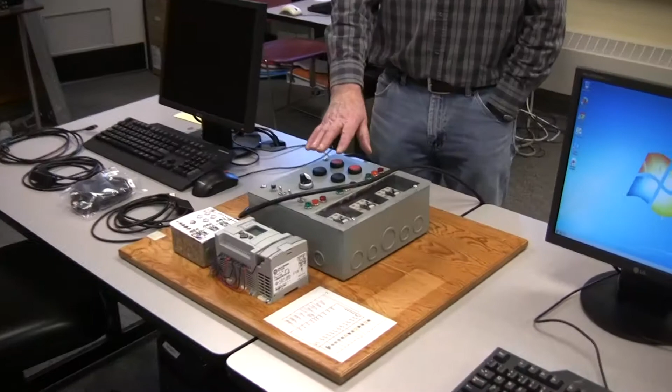The hardware is mounted on a piece of plywood. It contains everything that is needed to do the labs. At the bottom we see the PLC itself with an expansion module that's been attached to it. Beside it we have the 120 volt input power supply in a 4-inch square box with a printout of the I/O configuration. That's the input and output addresses.

The large gray box, of course, is the actual field hardware. Things like push buttons, stop and start, hand-off-auto, momentary push button, toggle switches, and the outputs will be represented by lights, 3 contactors, and there's a real wimpy little horn type affair inside of it.

So what I'm going to do to begin with is I'm just going to take a moment and I'm going to hook this up. And what I'm going to ask my lovely cameraman to do is to focus in on the PLC LCD screen, get right over top of it, and you'll see the self-diagnostic that takes place when it's first powered up. So I'm going to do that now.

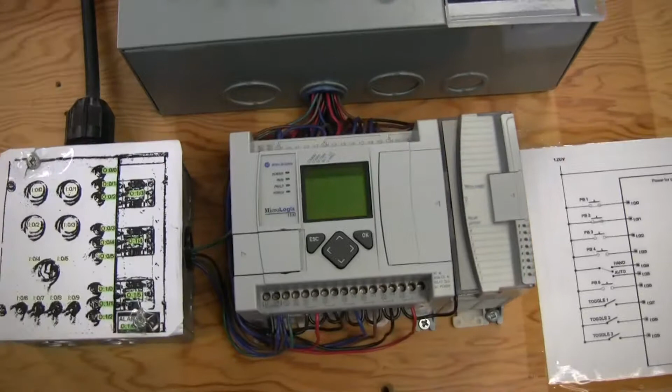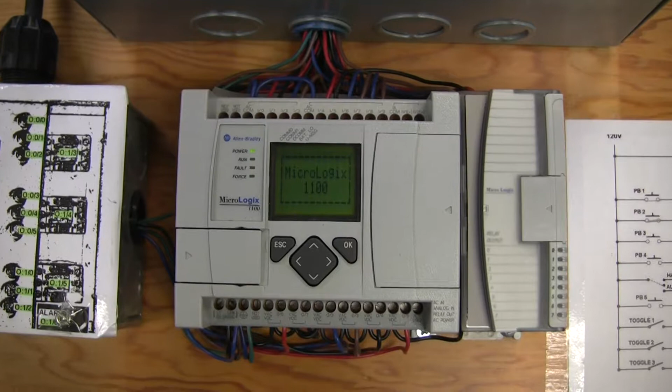All right, the self-diagnostic is complete, and we can see that the PLC is now up and running. It is in run mode, and the screen that is being shown is the status of the inputs and outputs. At the top you see a bunch of little boxes that are either shaded black or open white, and that tells me that their inputs are either on or off.

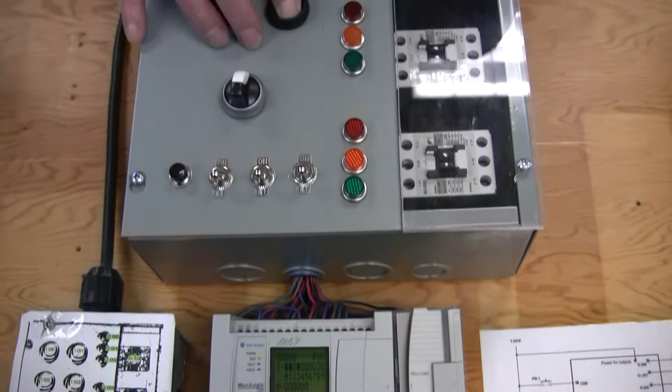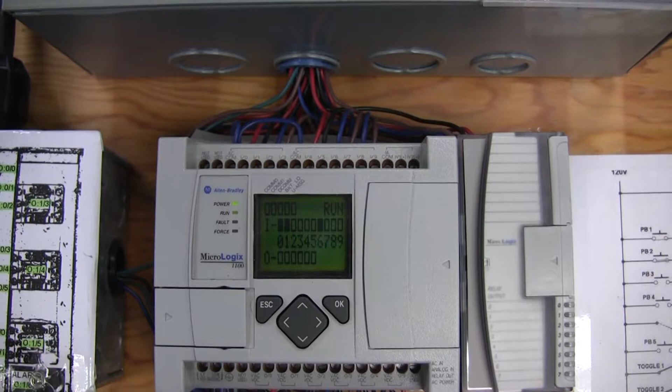I'll press a start button and see if you can tell the difference. Start button on, start button off. Start button on, start button off. I'll try the toggle switch. Toggle switch on, toggle switch off. Momentary contact, on, off. All right, so we're good to go. The PLC is up, it's running, it's in the run mode.

I'd like to have a look at some of the communication cables. Because what we're going to do is we're going to hook this device, the PLC, up to this computer here, and we're going to be doing some programming and changing how the PLC behaves. But in order to do that, we have to communicate between the PLC and the computer.

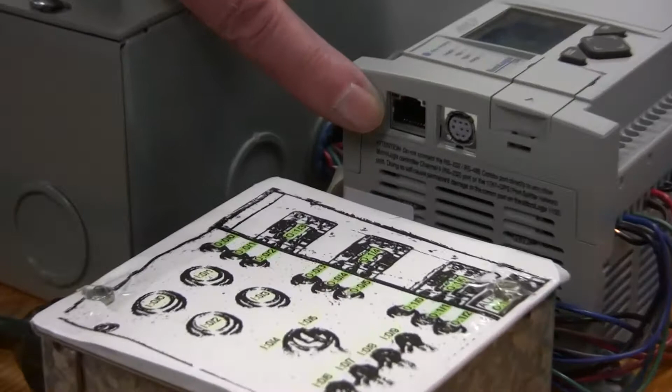Okay, if we could have a look on the side, and we'll introduce the 2 communication ports right over here, Dave. Okay, so I have 2 communication ports. I have an Ethernet port here, which we're not going to tackle. I mean, we certainly could, but we just get congestion on the network. This is a serial port, and this is the port that we will use.

Okay? Have a look at the desk in front of the next computer station, and you'll see 4 different cables. All of the cables have the serial end connection. This is the end that goes into the PLC. If you look closely, and I'm not sure how good the camera is, but there's an actual arrow embossed in the plastic, and that arrow goes to the top when you plug it in.

Okay, we were talking about the serial connection that goes to the PLC. These connections are what they call keyed, meaning they can only go in one way, and that's where the arrow comes in to help us. The arrow is pointing up when you insert it into the PLC.

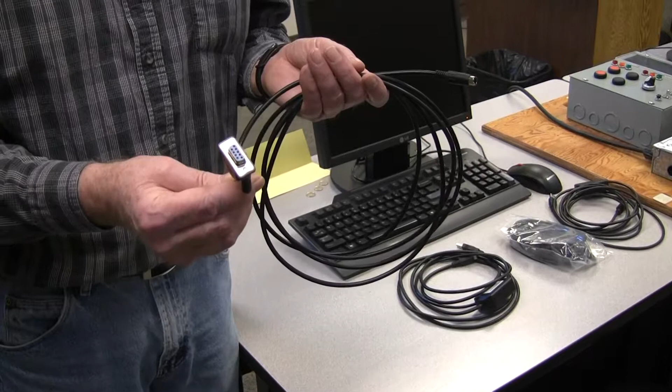All right, now this cable has a different end on it. This end goes into a computer, but this is a rather old style serial port, and many computers no longer have these. Luckily, ours do, but perhaps the next time they refresh this lab, the computers won't have this, and we're going to have to find another option. That's where these converter cables come in.

Again, we see the serial end that goes into the PLC, but this time the other end is much more familiar. This is a USB end, and it fits into any common USB port. We've used these for about 4 years perhaps, and we have 3 different versions of this serial to USB conversion.

This black unidentified box is version 1. It's very glitchy and tends to lose communication regularly, so we're not going to be using this. If you see one of the PLCs that is using this particular cable, just take it away, replace it with a newer one, and you'll have less problems.

This is the second version. Again, serial to USB, but this time it's labeled. And you can see that it actually has a date on it. The date in this particular case is 2015.

This cable is better than the first one, but we found that we still get drops on this. Occasionally, when we're communicating with the PLC, it'll just lose communications. We're not really sure what's causing it. We think it could be a driver issue, but it's just something that we've had to deal with.

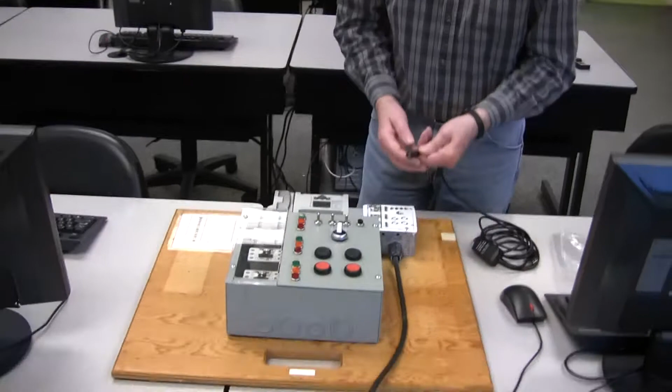I'm making sure that the, boy, I say a lot, eh? I can edit that out.

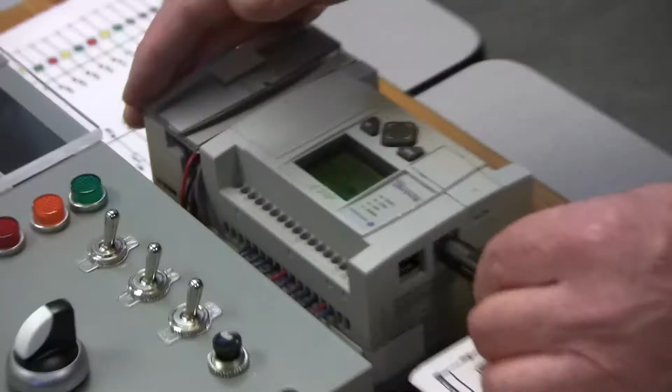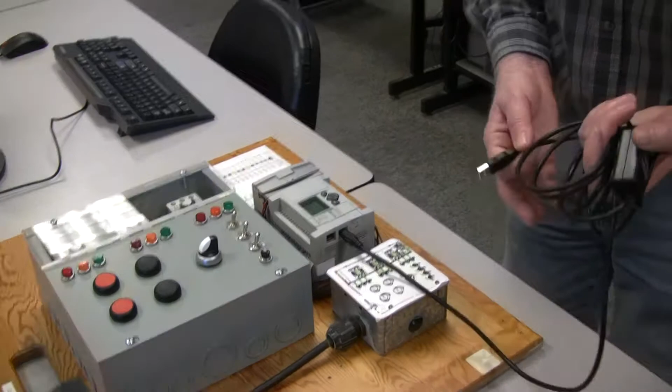This one is very hard to see the arrow, but I can see it. I'm going to ensure that it is facing upwards when I insert it into the serial port. Be very gentle. Those pins will easily bend and pretty well render the cable useless. One end is done. I'm going to put the other end into a USB port on my computer.

There are 2 programs that we use when we're programming PLCs. One program is strictly used for communicating to make sure that we're talking to the PLC. However, before we do any work on either of those 2 programs, I have to go into Windows and do a little investigating. So I'm going to go into Start and Control Panel, and then I'm going to find Device Manager. That's what I'm after.

It gives me a warning that I'm not an administrator and I can't make changes. Well, that's okay. I don't want to make any changes. I just want to see something. This is Device Manager. I'll make it big. So the information I'm looking for is in ports labeled COM and LPT. If I click in front of that, I'm going to see right here USB serial CH340.

I'm going to make that bigger if I can. I'm not sure if I can zoom that up for you. I'm afraid I can't. I think I got it. You think you got it?

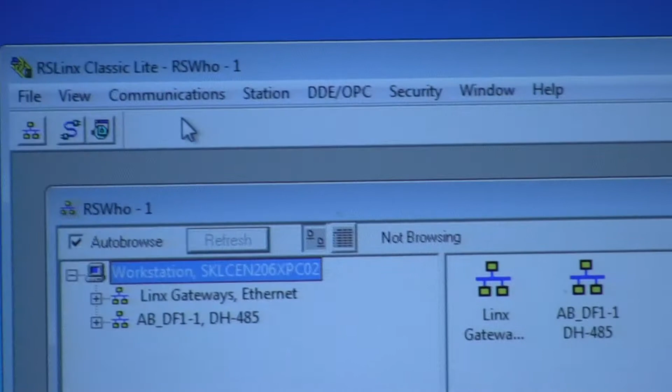All right, I'm taking a look at a typical screen. It may or may not come as it's shown here. If this program starts with nothing but a gray screen that looks like this, all you have to do is go to Communications and click on the very first option, RSWho. That will give us that same information window.

I'm going to make it big. Wonder if I can make this larger. No. What I'm going to do is I'm going to click on the DF1, Delta Foxtrot 1. That's our driver. That's where my PLC should be. I should be seeing something there. And indeed, I'm seeing that the MicroLogix 1100 is connected there. But there's a red X in front of it. So I have to get rid of the red X. The red X tells me, of course, that it's not communicating yet.

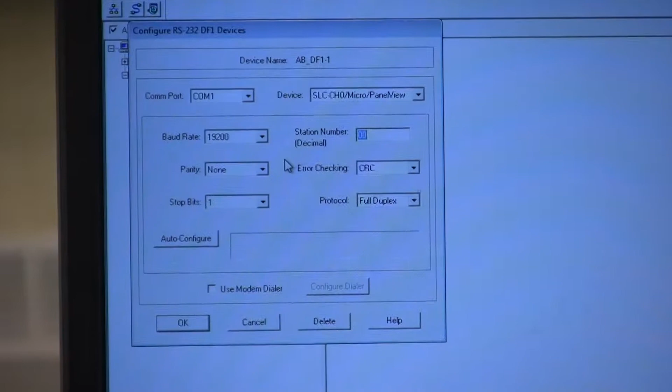Simply click on it to highlight, then right-click, and select Configure Driver. Here is where we change the COM port. The reason it's not communicating is because this is set to COM port 1. I need to change that to COM port 6. Click the drop-down box, scroll down, there's COM 6. Make sure that you've selected the proper COM port, and there's just one thing left to do, and that's click the Auto Configure button right here, the Auto Configure button.

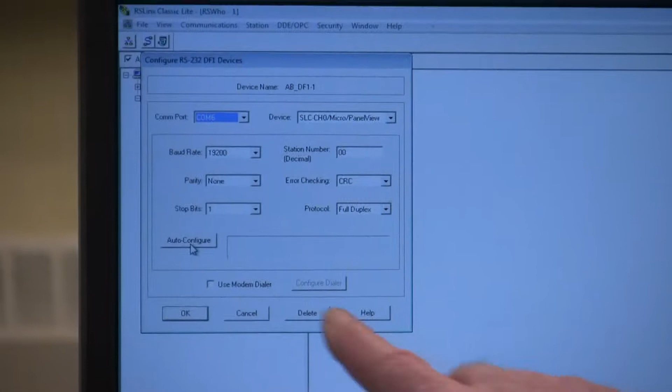And it's not necessarily always going to be COM port 6, am I right? Oh no, that's the problem. The whole problem with this communication is the COM port changes. So if I unplug it from this computer and plug it into another computer, that other computer will put it on COM 8, or another one will put it on COM 5. So I have to always know the COM port before I come in here to change it in RSLinx.

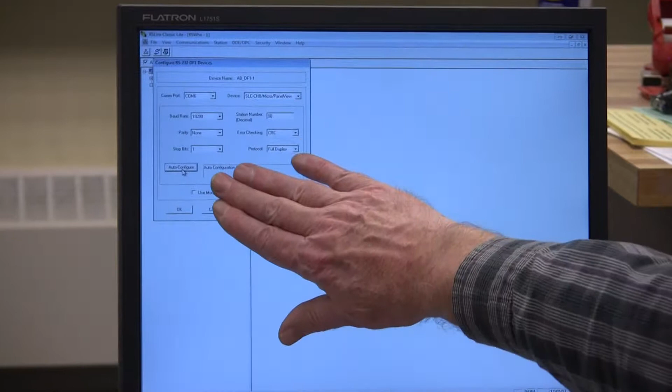In this case, I get a readout that says auto configuration successful. There is one peculiarity with this program, and that is occasionally I'll hit auto configuration and it'll come up with an error screen. Get rid of the error screen, and behind it you'll see that it'll say auto configuration successful. It seems to be a glitch in the programming of the software itself. But all I'm after now is this printout, auto configuration successful.

I'll click OK, and just wait a moment, and the X disappears. The X is now off of the Micrologix. The PLC and the computer are now connected and talking to each other. I'm going to minimize this. I could close it, there's no problem with closing it, but I'm just going to minimize it in case I need to get back in.

And we'll now have a look at the second piece of Rockwell software, and that's the programming software. It's called RSLogix Micro. So we go into all programs, and again we go to Rockwell software, RSLogix Micro, English. We don't have the French version. And I'll click on that. And we're presented with this screen. It is a blank slate.

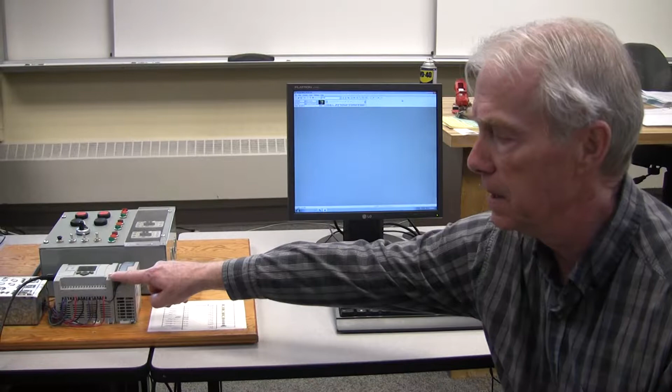We have no program yet to manipulate. There's two things we can do. We can start a new program and start building a new program, or we can have a look at what's already in here. A student has been programming on this, and there is a program in here. It's kind of cool to have a look and see what the last class has done. So what I'm going to do is take a look at the program that is running in this PLC right now. And in order to do that, I go up into comms. There's a tab right at the very top called comms.

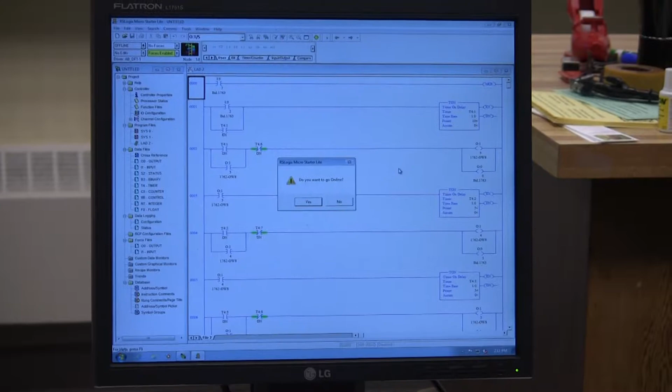And the option I have is upload. All right, that's the only option I have. I'm either going to download into a PLC or I'm going to upload from a PLC. Those are the two ways I can communicate. Right now I don't have anything built, so the only option I have is to actually upload from the PLC. I'm going to give that a try. You just click the box that says create a new file, and the uploading takes place. And there's a box that asks if you want to go online, and you can click yes or no.

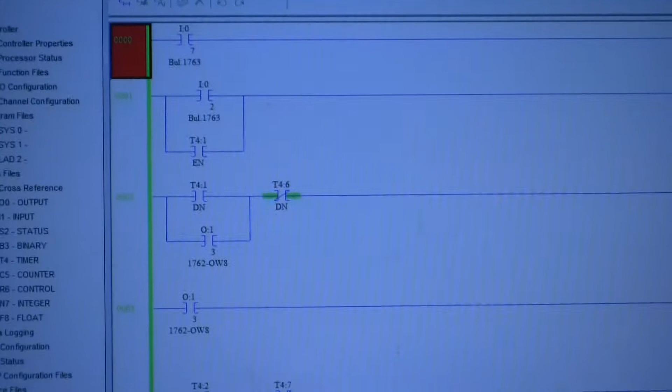And you can scroll through this program and take a look at some of the work that the previous student has done. There appears to be a lot of timers here. Actually, there's quite a few timers here. You could possibly run this program if you wish, but that's getting a little bit ahead of ourselves. Anyway, it's just kind of cool to look at what some of the other people have done.

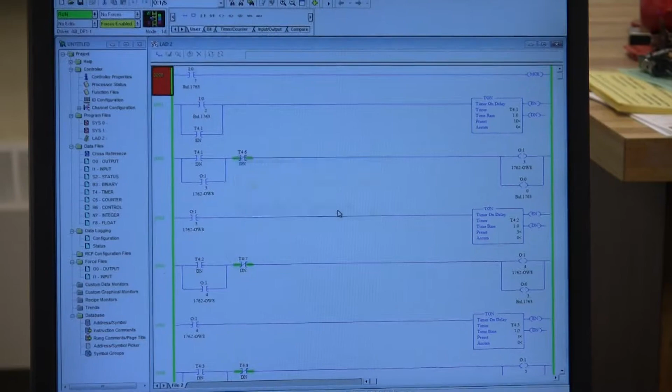What I'm going to do now is start a new file and a new program, a new project for us to build. And all you do in typical Windows fashion is go File, New, and it's going to ask me if we want to close this existing file, and of course we're going to say yes to that. We're not going to save any changes to it.

And we're presented with this box, and this is a very important box. This tells the program what PLC we have. This software can work with a bunch of different PLCs, but we have to know which one we're programming for. We're programming for the very first option, which is an 1100 Series B. So there's no need to change anything here. Just click OK. That looks a lot better. Now we've got a blank white space here where we can build our program.

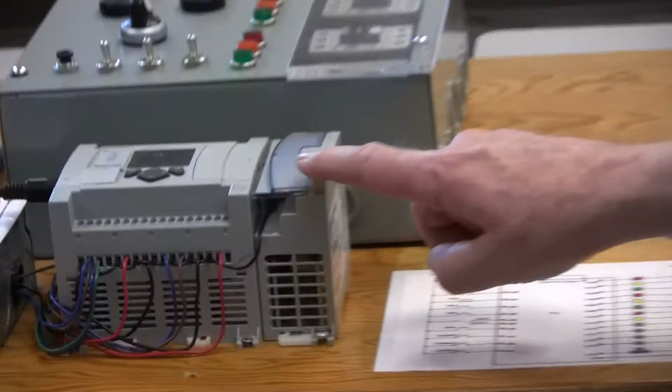But we're not quite done yet. We're not quite done telling the computer about our PLC. We have to tell our computer that not only do we have a PLC, we actually have an expansion module as well. So I have to tell the computer about this expansion module. And I'm going to do that by going to, on the left-hand column, something called IO config. This makes sense because the expansion module is an additional output. So I'm going to double-click that.

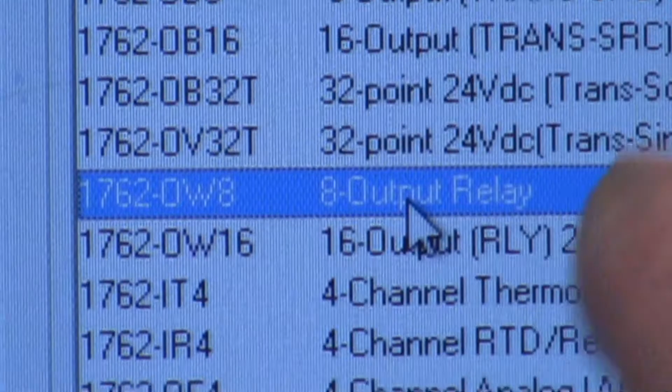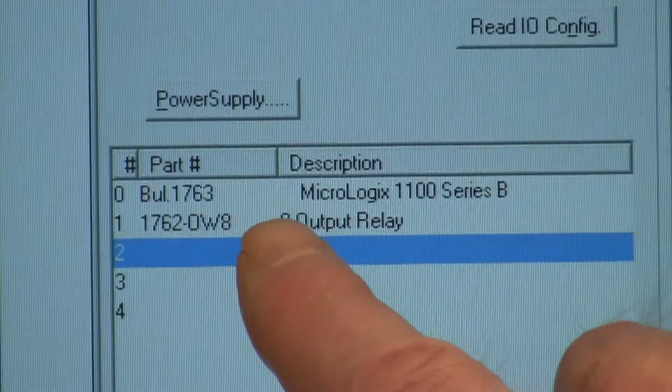If you read on the side of the expansion module, you'll see that this is a 1762-OW8. You can make that selection on the right-hand side here, and I'll highlight it. And there it is. And all I have to do is double-click, and it'll move that over onto my PLC. This is my PLC here. These are the available expansion modules. I'm going to double-click. And now you'll see that I have my MicroLogix 1100 Series B and an 8-output relay expansion module OW8. This is good. We're done with that. I can just X out of it.

All right, this is quite a procedure, but believe it or not, it will get to become second nature. You'll be doing it fairly regularly. We'll do a really, really simple program on the screen here, and we will then download it into the PLC. We'll take a look at how it works, and from that point on, you can work on your own projects.

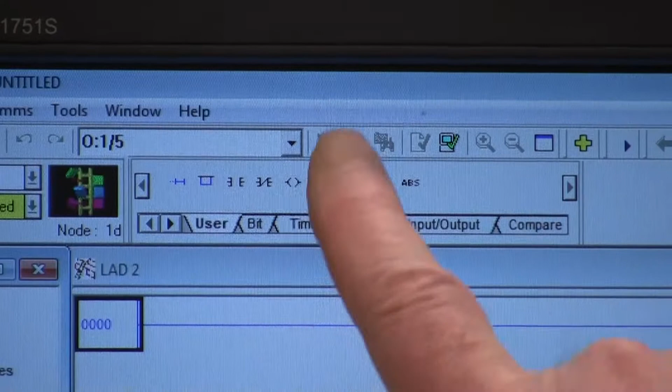Okay, we are going to make our first simple program. We're going to take a look at the software, and at the top of the software we're going to see some familiar symbols. We have our examine on, our examine off, and our output energized. That's right at the very beginning of this software under the User tab.

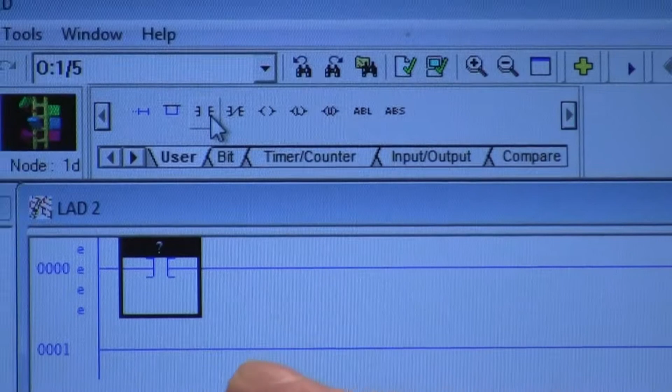All I have to do is highlight the rung. So I'm going to highlight the rung in red, and then I'm going to start clicking on the devices I want. I'm going to click and it'll insert automatically my first examine on. Now this is where it gets really, really easy to manipulate. The next contact you're going to bring in, click and drag it. Don't just click, but click and drag it.

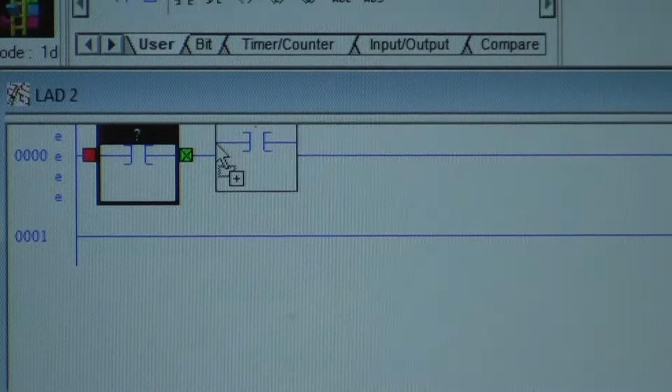And you'll see some red boxes show up. You can drag it around to wherever the red box turns green. So I've now turned the red box green. I'm going to let it go. And I now have two of those instructions, both examine on. And I'm going to actually just do a little stop-start station here.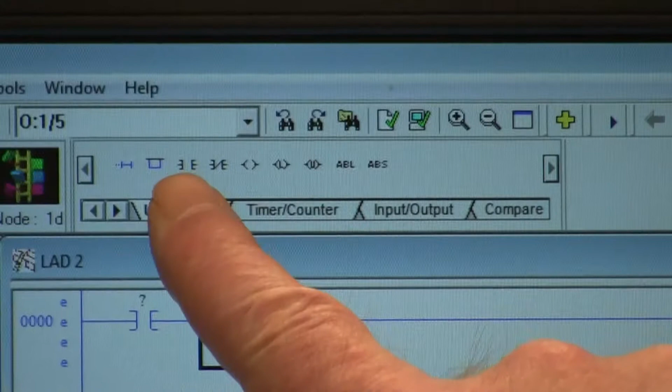So I need a branching circuit, and right to the left of the examine on is the branching circuit. So I'm going to click and drag that. And again, bring it to a place until it turns green, and you'll see that it's not doing me any good here. But I do have a rung that's highlighted, so I'm going to click and drag that and bring it over until it turns green, and now I have my branched instruction around this examine on.

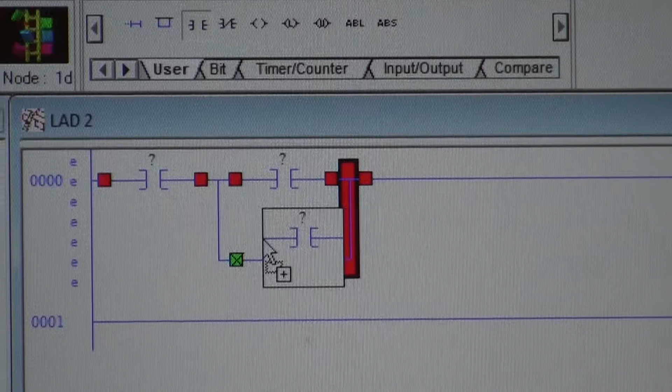What do I do now? I go back up, click another examine on, drag it down, and I can put it anywhere. I've got a lot of options. I'm going to put it down in the bottom rung. It's turned green. And I now have my stop, start, holding contact configured in software. I still have to put in an output energized, but that's relatively simple.

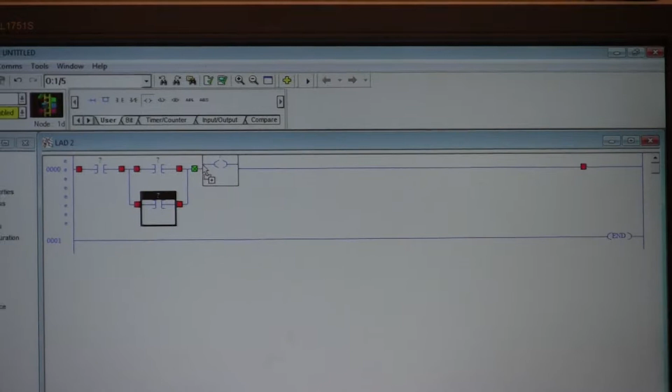I'll click, hold, drag, and if I put it here where it's turned green, it's probably going to snap to the end anyway, because a coil or an output energized must be the last item on the line. And it did. It went all the way to the end.

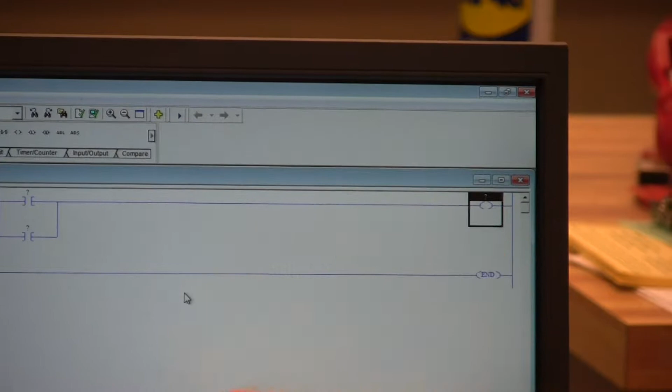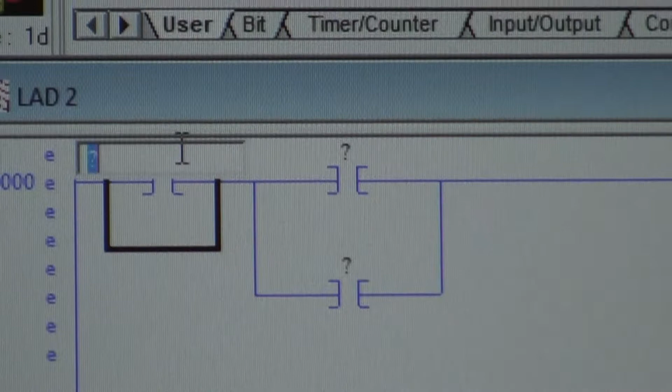So what's left to do with this is I have to give some addresses to this. If I tried to run this program, it wouldn't even allow me to download it because it doesn't know what the addresses are. So I'm going to start inputting addresses. There's a little question mark above each of these instructions. I'm going to double click on the question mark. And this is an input, so I'm going to look over here on my input diagram here, and my stop button is input 0/0. So that's the address I'm going to put here.

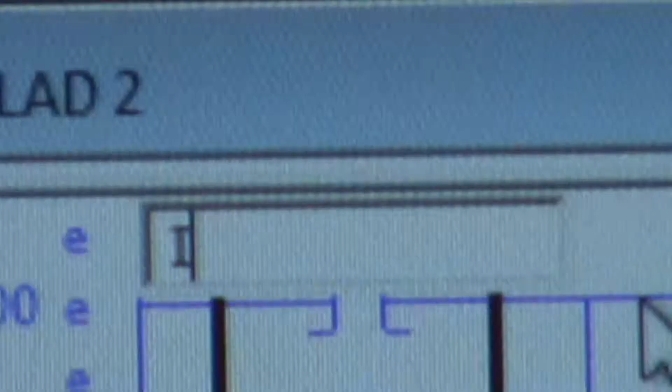Now please pay attention, because it's critical that you put it in this way, or else you'll get an error. So what I'm going to do is I'm going to go I, Shift, colon. So this is not a semicolon. A semicolon will give you an error. I have to have the two dots, not the dot and comma. So that's a colon. This is what I've got. I've got I, colon, 0/0. That is an address for the stop button. I:0/0.

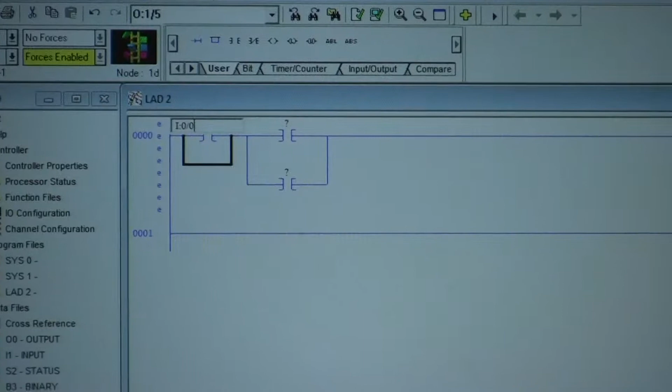And you can see them. They're listed and detailed on the I/O sheet on the PLC backboard. So you can get any address you want off of this roadmap. So I'm going to take a look for a start button. And the first start button is input 0/1. So I'm going to now put that over my start button.

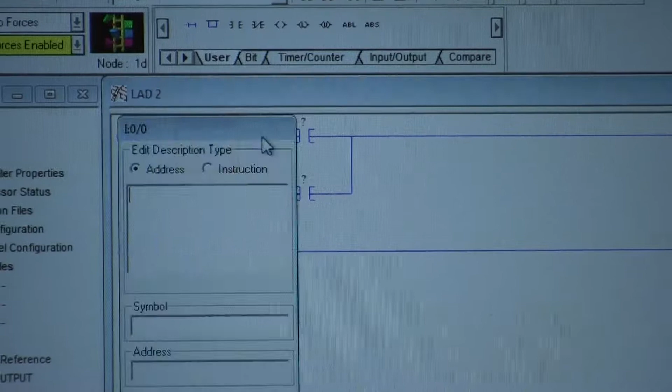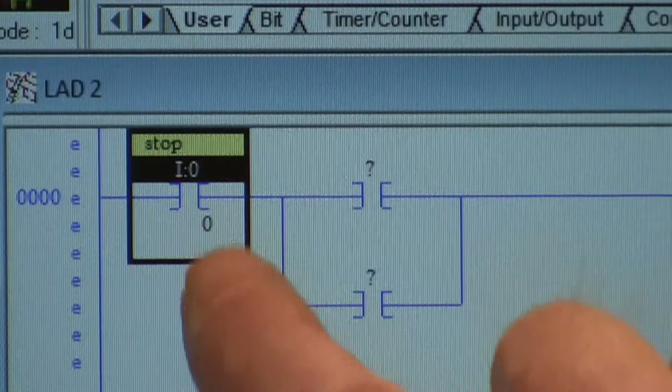There's an annoying little feature here. When I hit enter after I've inputted an address, I get this description box. What I can actually do here is I can actually put a label on this. So that's what I'll do. I'm going to put stop and click OK. And now if you take a look at the screen, not only will you see the address, but you'll see that this is a stop button.

Okay, I'll do the next one a bit more quickly. I'm going to put input 0/2. That's the first start button that's available. 2. And I'm going to hit enter, and I'll put START. That'll indicate that this is my start button. Good. And we're good to go. And now I'm going to go all the way to the end rung, all the way down here, and I'm going to put in my first output instruction.

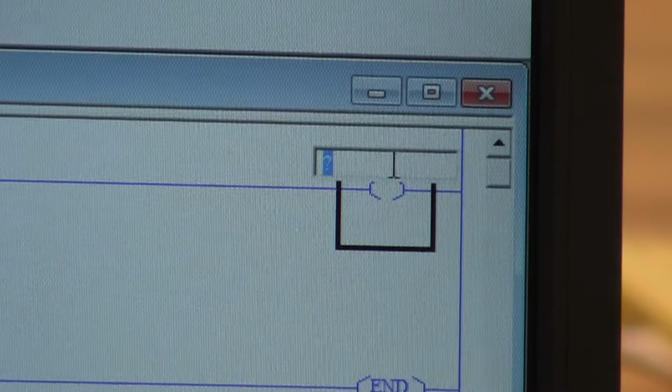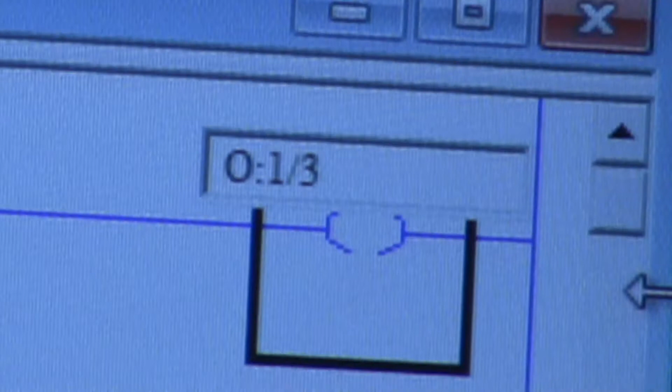Now I want to be dramatic because, well, people like to be dramatic. You know, lights are nice, but I like to hear noise. I'm going to make a contactor energize here. So I'm going to take a look at my first contactor address, and it is output 1/3. So that's what I'm going to enter in here. Output: 1/3. Hit enter, and I can call this what I want. Perhaps this will be motor 1.

So now I have a stop, a start, and motor 1. Now in motor control, you're used to using a holding contact to seal in the operation of a stop-start station. But in PLCs, we don't need a dedicated holding contact. We can actually use the output energize instruction itself as the holding contact. Let me show you what I mean.

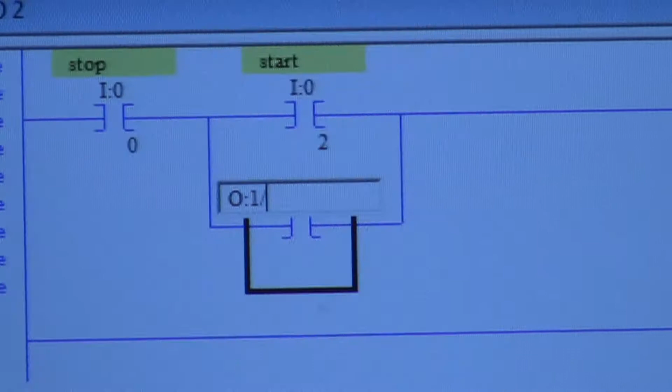I'm going to address this output :1/3. I'll hit enter, and you'll see that motor 1 output is going to form the holding contact for my stop start. I think I've got it. I think this is a good, valid program. But before I do anything, I have to verify that there's no errors because, well, everybody does make errors. And up at the top, you're going to see...

You've never made an error. Come on. Well, no. Other people make errors. Okay, thanks. Other people do.

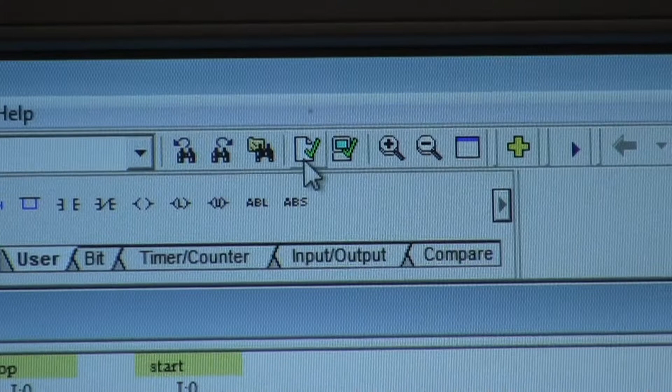So I'm pointing out here that, right in the middle, there's a little green check mark. The little green check mark is what I'm going to press, and it'll scan my program and inform me if I have any errors. And down here at the bottom, it says verify has completed, no errors found.

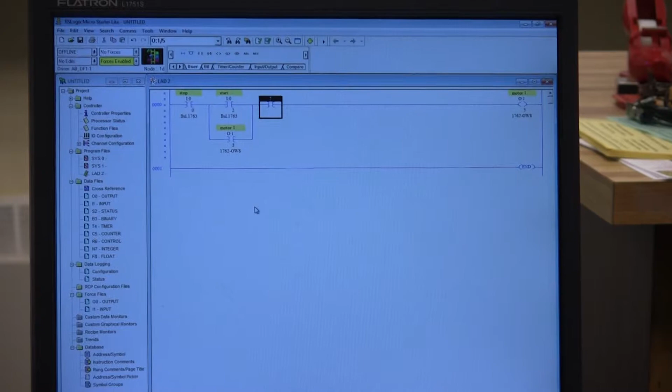I want to show you an error, so I'll deliberately place an error in this program. I'm going to grab an instruction, I'll place it, and I won't address it. That should be an error, so I'll go back up and I'll try to verify. Now you'll see at the bottom a box has opened, and it tells me rung 0, instruction 7, error. It says the operation has not been entered. We have to enter something for this instruction.

So the software will tell you if you have your program done right or if you've got errors in your programming. Right now I'll just delete that because of course I don't need it to run. All right, we're ready to go. I now want to get this program into the PLC. If you remember, when we wanted to go from PLC to computer, we uploaded. Well, what we want to do now is download into the PLC.

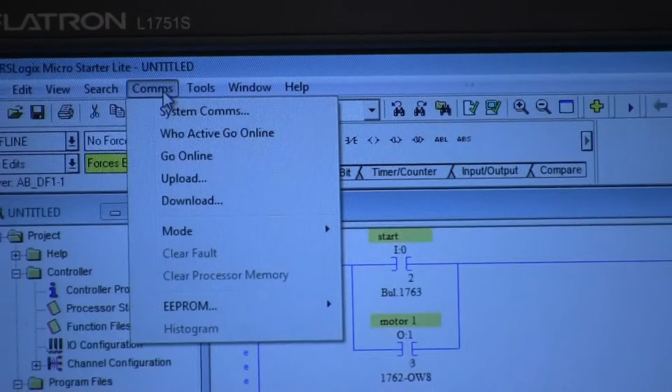If you remember, we went to comms, and the only option I had was to upload. But if you notice now, I do have the download option. So that's what I'm going to select. Okay. It's going to ask me to save my project with a file name. You should always do this. I'll just call it basic stop start. Remember where you save it. I save it to the desktop, but it does tend to get a little cluttered. But at least I know where everything is. So I'm going to save it to the desktop.

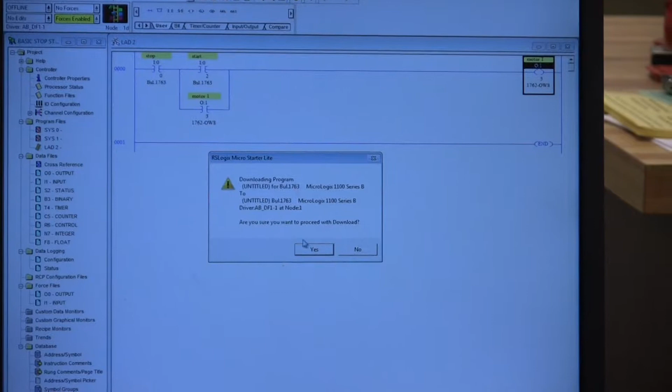All right. Now it's asking me, are you sure? Do I want to download it into that computer? Yes, that's exactly what I want to do. But now it gives me an error. It says the processor is in run mode. This software will not download a program into a PLC that's already running. So I have to change that mode. And if we'll just pause for a second, the camera will go back to the PLC and we'll take a look at how to change that.

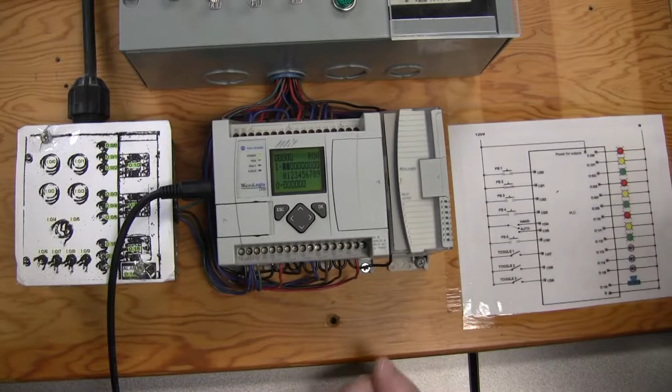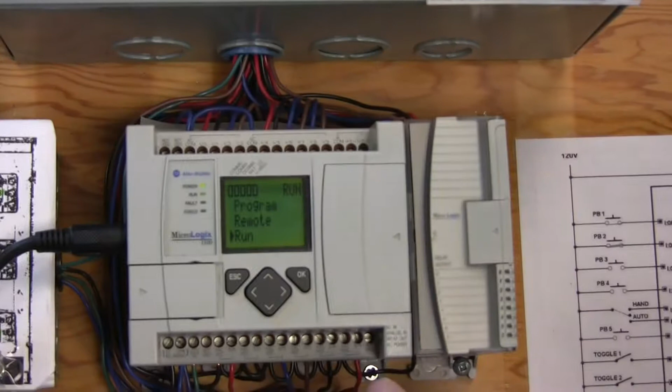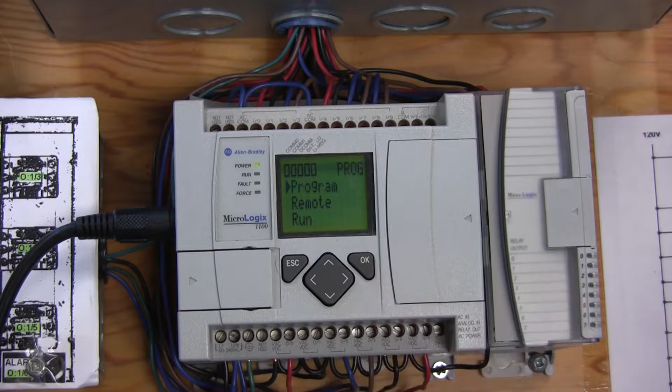All right, we're looking at the LCD screen on the PLC. We have to change the mode. The very first thing we have to do is escape from this screen. This is the I/O screen. I hit escape once. Notice I have some selections here. I now want to go into the third selection down, 1, 2, which is mode. And here you can see that the arrow is pointing to run. I have to get the arrow off of that, so I'm going to cursor up twice, 1, 2, and I'm in program mode. Okay, so now this PLC is ready to accept a new program.

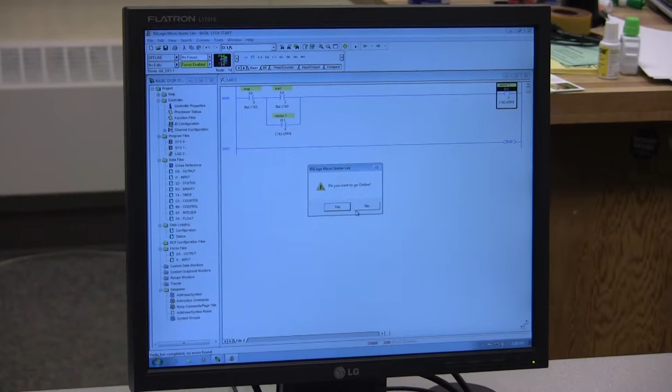All right, the error screen here says the processor's in run mode. I click OK, but I've taken it out of run mode. My program is now downloaded into the PLC. It's asking me if I want to go online, and yes, of course I do. But what I have to do now is go back to the PLC and put it back into run mode to see how my program operates. So pause and we'll do that.

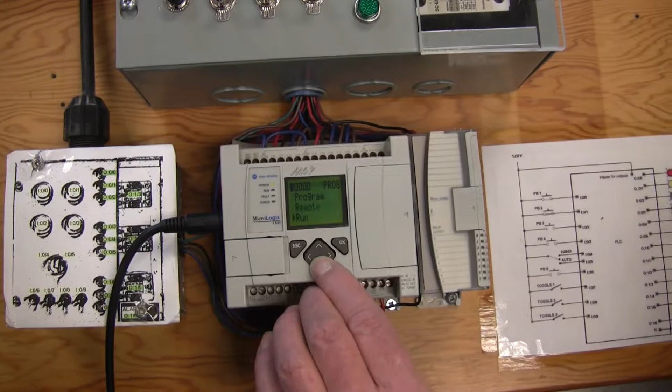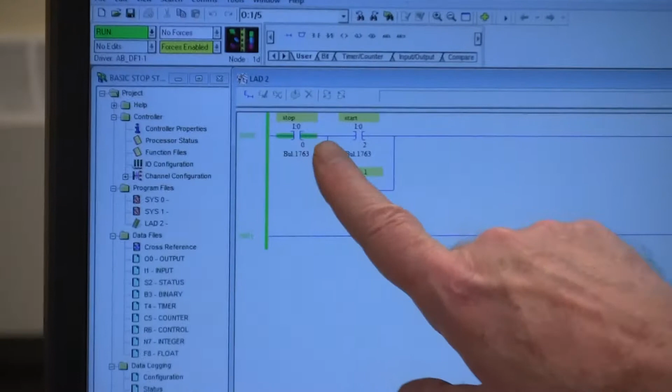All right, all I have to do is 2 cursors down, 1, 2, and hit OK. And my PLC is now in run mode. So let's pause and come back to the screen and we'll see something that has appeared. All right, the side rails are highlighted in green and our first instruction is also highlighted in green. And it should be, because this is a stop button. It's normally closed, so I'm examining if this is on and this input is on.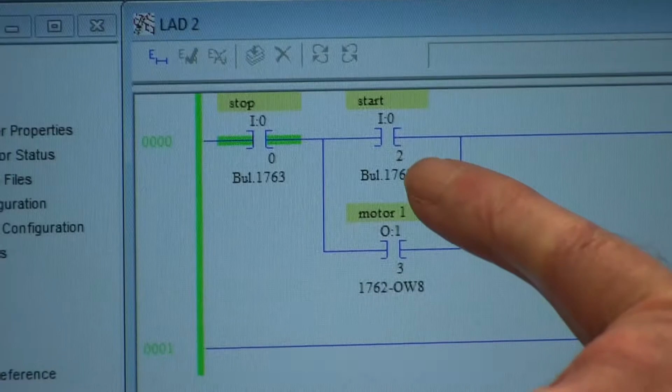So now what I should do is go over and press the start button, and see how the highlighting changes here. And then of course I expect the output to energize, which will in turn seal itself in. I'll hold the start button down for 3 seconds and we'll see if that takes place. I'm going to try to get past the camera.

All right, here we go. I'm going to press the start button, hold it for 3 seconds. 1, 2, 3. You'll notice the start button is no longer showing that it has been closed, but the program has sealed itself in since the output has energized, and I can use that information to seal in a basic stop-start circuit.

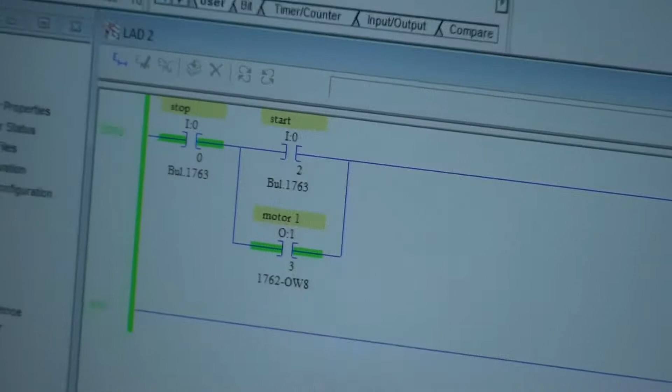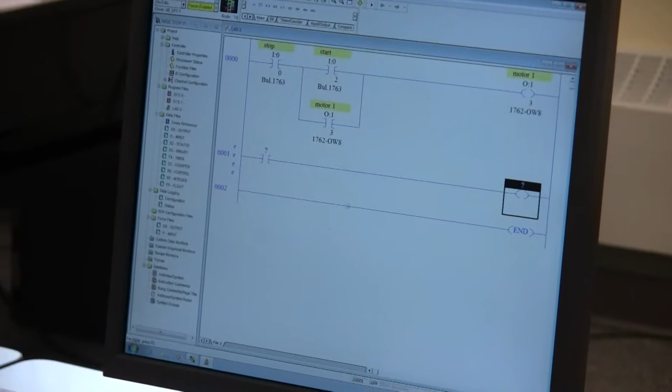Okay, earlier we talked about verifying our program for errors. There is one error that seems to slip through, and it's a mistake that students will make without really deliberately intending to. And I'm going to briefly show you what I mean. I'm going to put another rung in with a simple examine on and another output energize. I'll address the input to the second start button. So that'll be input :0/3. But this time I'm going to take the output to the same as the one above it. So I'm going to use the same address twice.

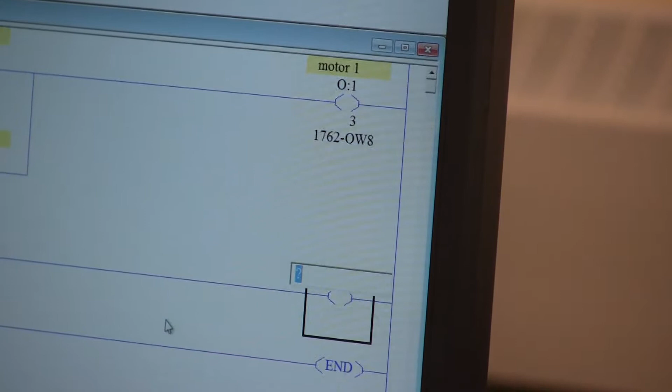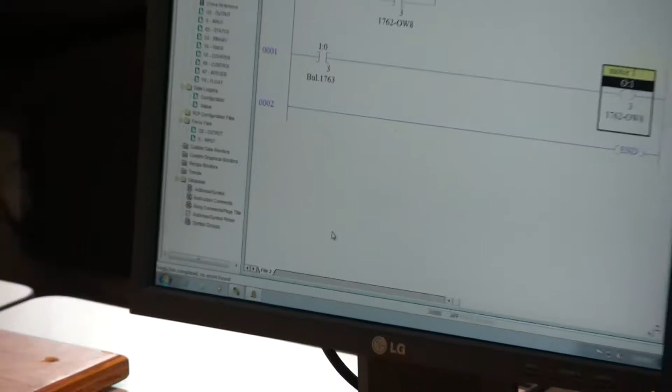Output :1/3. All right, I'm going to verify it for errors. So I'll press the green check mark, there it is, and it shows that there are no errors. I'm going to download this into the PLC. So that's comms download. If you'd like to make a note about the revision, you could perhaps put a revision note in here, added rung number 1, if you'd like to keep track of your changes.

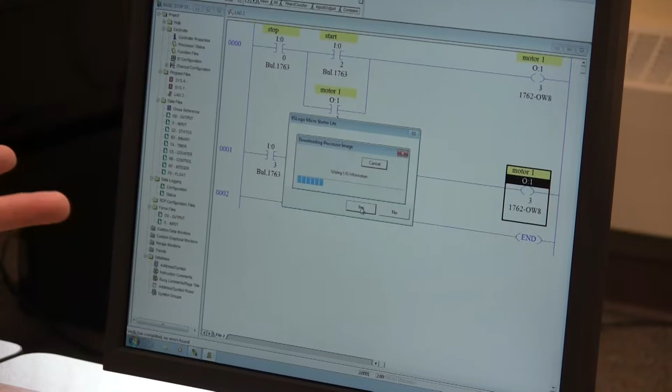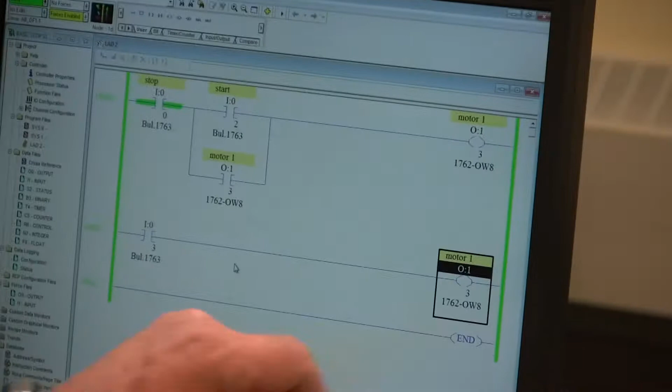And it's going to ask me if I want to download. Of course I do. And the download is underway. It doesn't take long. Yes, I want to go online. And now I have to put it back into run mode. So I'm going to go to the PLC and quickly do that. You'll notice run mode because the side rails turn green and the stop button is showing that, yes, the stop button is still closed, so I do have an on signal. But once again, I just want to show you this error. I've got the same output address, all right?

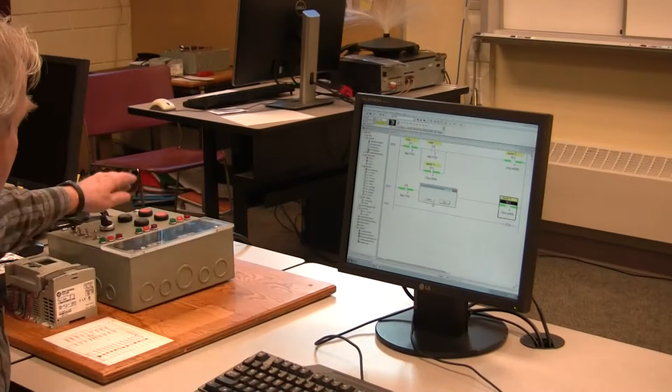So I'm going to come back here and I'm going to press the second start button. That works great. I'm going to go back and press the first start button. I have to stop. I've now lost communications to the PLC. You may remember I mentioned that these cables can be a little finicky. Well, we've just encountered that. This is the error that you'll see.

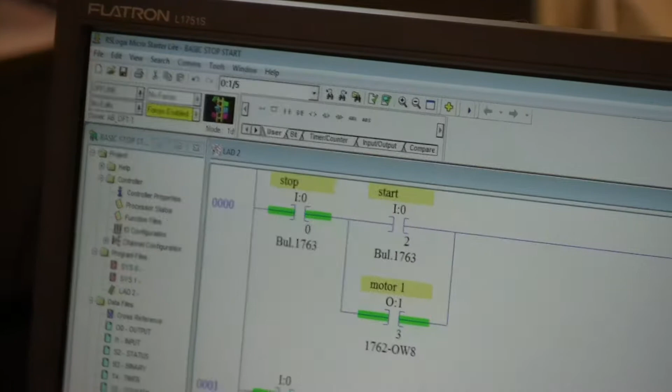So what I'm going to do is I'm going to go offline. I'm going to go back to RSLinx, and you'll notice the red X is back. That's quite annoying. But all we have to do is highlight the blue box, right-click, configure driver, and auto-configure again. Once again, it shows it's successful. Click OK. The red X is gone, and it'll be communicating. Oh, I have to put it in run mode. It is in run mode, so I'm going to go online.

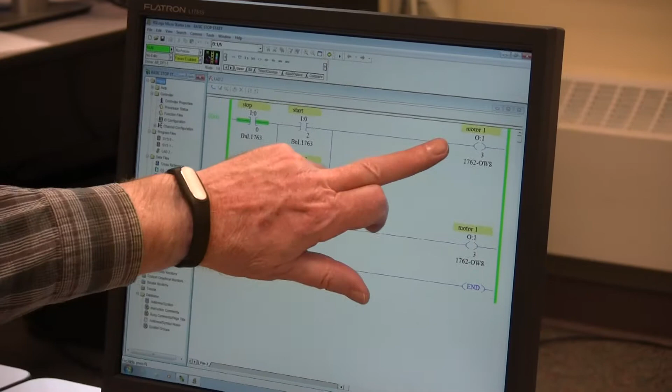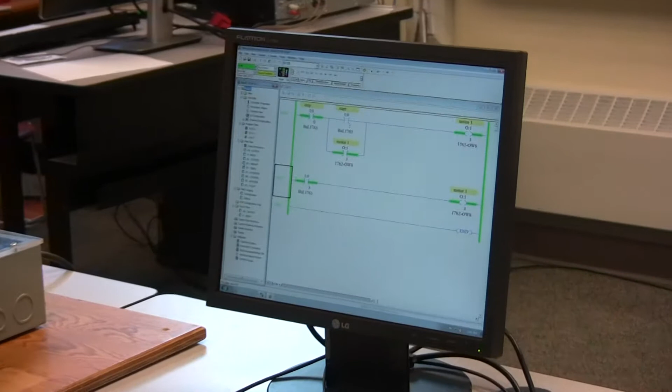There we go. Again, we're demonstrating a common error condition that students inadvertently make. They'll take this same address and try to energize the coil using two different rungs. This is not functional in this software. Again, second button works. First button, nada. Stop button is off. The program has failed. There is no control on that output anymore.

So to re-summarize, when you're making your programs, please do not use the same address more than once as an output. You'll just run into all kinds of errors. If you need that output on more than one rung, we'll use our control relay trick. So we could use our first rung as a control relay and then multiple points of contact from that control relay in various rungs. That's probably the easiest way to overcome this. Other than that, I think that pretty well covers this particular error that you might encounter.

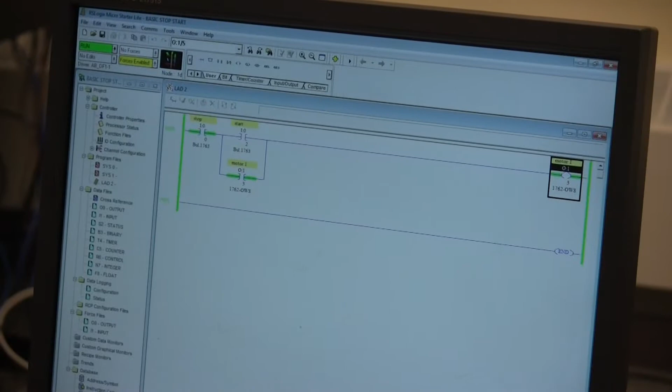This is basic introduction to PLCs. We've learned about the communication cables that are used, and I made the suggestion to get the most recent one, get the one that's 2017. However, if you have connection problems, the one thing that we can do is we can fall back on that very, very early version, the one with that long serial port, which is this one. This one never drops out. However, we're trying to phase them out because, well, our next computers just won't have this port.

So good luck with your communications and good luck with your programming. We always find this to be probably one of the most enjoyable parts of fourth year. We have a lot of fun with it, and I'm sure that you will too. Have fun.